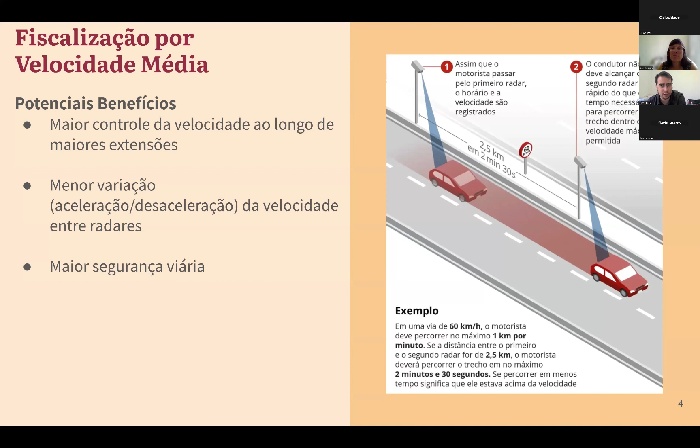The potential benefits we thought about in controlling mean speeds: number one is better control of vehicle speeds over a greater section of road. Imagine a long road of 5, 6, 7, 8 kilometers with different speed surveillance devices, but control only at a few points. With mean speeds, we could have better control across the whole corridor, avoiding deceleration between radars only. By doing so, we understand that we will improve road safety within these corridors.

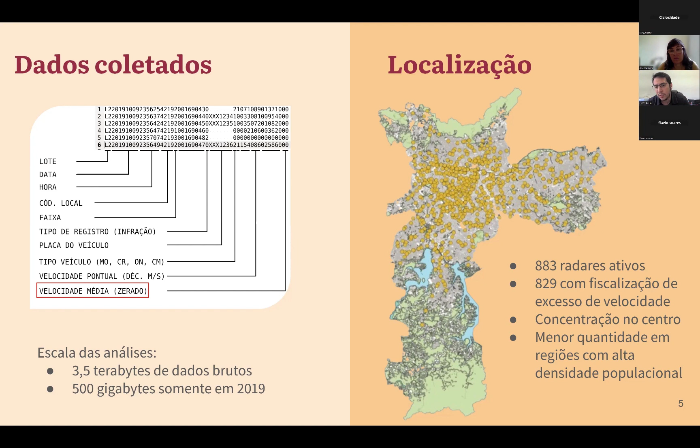So where are they located, these radars? To the right, we have a map with 883 active radars and 829 able to do the surveillance of excess speeds. We have a concentration of radars in the expanded city center, in between both marginal avenues, the Pinheiros and the Tietê avenues. However, we saw that we had less radars in regions with high density of dwellers, like the east and south zones of São Paulo.

The method that we used to analyze this data went through 4 phases. The first one was the cleaning of this data bank. Actually, they were not as organized as we would like, and we had to do the cleaning to remove some pieces of equipment.

So we used outlier removal based on intervals, excluding the data of radars that had been working for only a few days during the year. For the remainders, we also had to exclude days with very low volumes, indicating technical issues that day, so there are some gaps in identifying the problems and doing the maintenance work. So we identified and excluded those specific devices.

The second phase of our method, we defined some roads and sections, and we did the sequencing for the radars, through a physical continuity amongst these sectors. We did this in order to simplify the analysis, because we needed to be able to characterize these corridors.

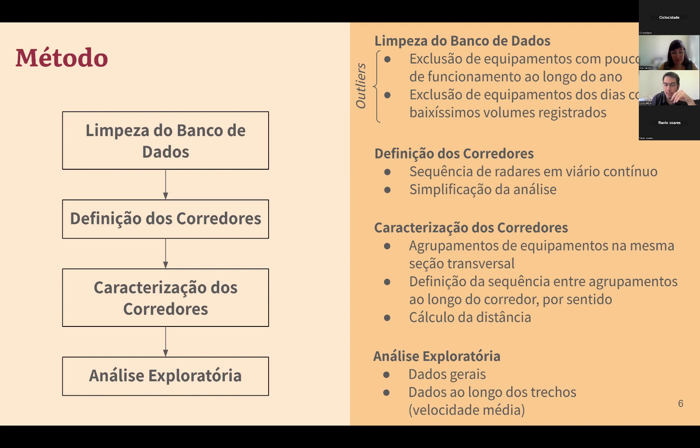And in the exploratory analysis, we defined the characteristics that can be improved for better surveillance of mean speed, and then we demonstrated the results achieved. A general view identified 28 sectors, and we only analyzed 23 of them because some were excluded after adjustments in the location of the radars. So basically, these are either arterials or express roads.

For the sides, we have here the flow of vehicles during the year. In Radial Leste, we have 34.8 million entries in the year, which is an average of 95,000 a day, bringing all the lanes together.

One of the things that we identified is this electronic surveillance in the city of São Paulo has a huge failure to identify the type of vehicle, whether it's a car, motorcycle, bus, or truck. We crossed this data with the CET data about volumes and speeds, and we saw that the mode participation of motorcycles was much lower in this surveillance rather than what we identified in the CET field research.

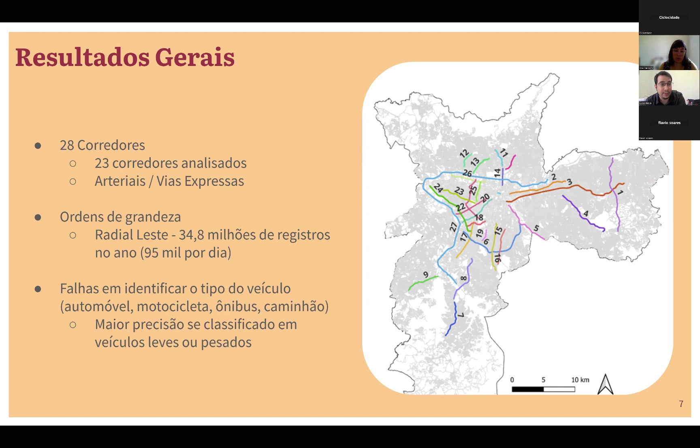However, when we classify these vehicles as light or heavy, the sorting is very close to what the field analysis showed. Some problems we had for speed calculation when we analyzed the data: first, we had a lot of consecutive radars without working simultaneously in many days of the year. For instance, radar number one worked on May 8th, but the next one did not work that same day, so they did not have simultaneous functioning.

This was one of the main issues that complicates the calculation a lot, because we should not have the entries for that sector on those specific days for the consecutive radars. Also, there's a high number of missing entries for the cars' license plates.

In our investigations, we had some meetings with producers and people who work with surveillance, and they said there are two types of effects that can lead to this: external failures like heavy rain, fraud, the solar angle, and drivers changing lanes as they go through the surveillance spots. All these variables can influence it a lot.

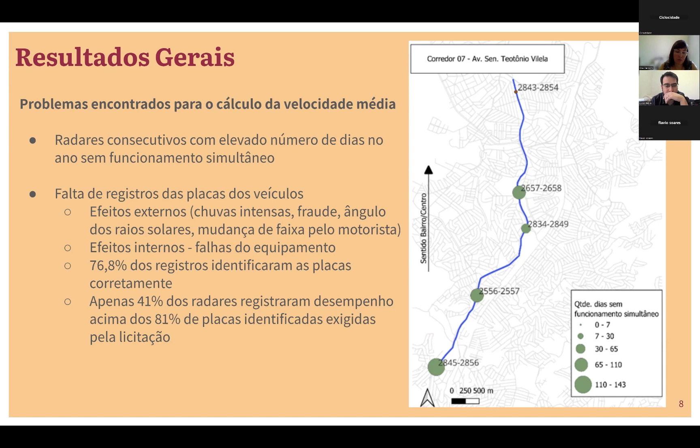However, we also have internal effects, which is the equipment failures themselves. If we take the average of all the radars we assessed, 76.8% of them identify the license plates correctly, but the bidding demands that the radars have a performance of at least 81%. So only 41% of the radars achieved this performance, and the other 59% were under 81%.

Now we have the sector results. The first one connects to what we just mentioned, which is the loss of entries due to device failures, and also because the vehicle doesn't always keep the same lane, so it may be captured by the first radar but not the second, since it left the lane. In the graphs, on the Y axis we have the percentage in green for the first radar and in orange for the second radar, for every sector. Basically, none of them will reach over 50% — very low, very low.

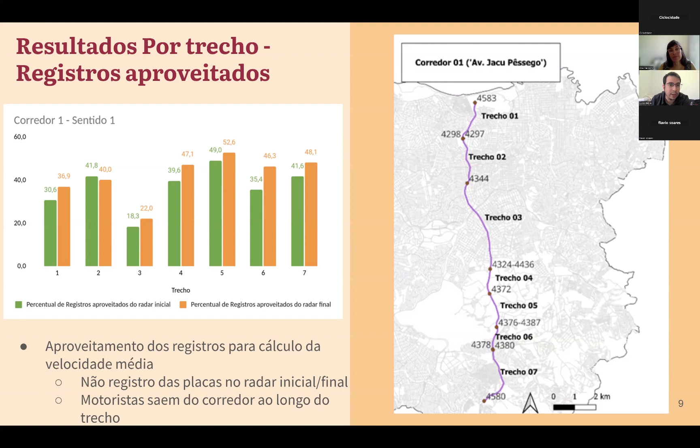And all this will cause damage. Imagine the number of people that go through these radars. If we're going to assess average speeds, we'd only be speaking about a low percentage that can actually be calculated.

Now, looking at the analysis, we have three examples of sectors with three different characteristics. The first one is Jacu-Pêssego Avenue, which is an expressway. Specifically at the beginning and the end, they are expressways with very similar features to different roads.

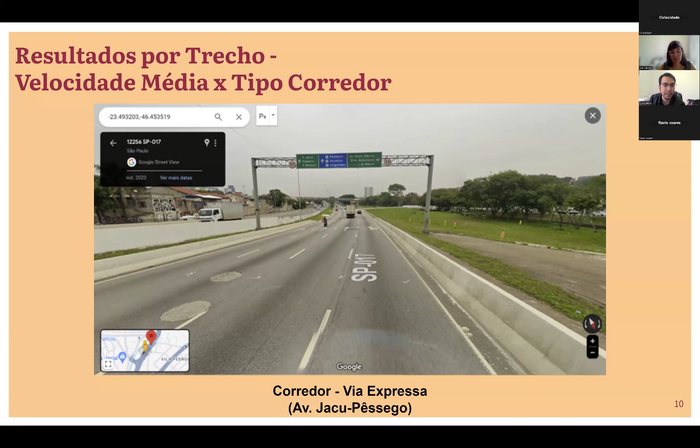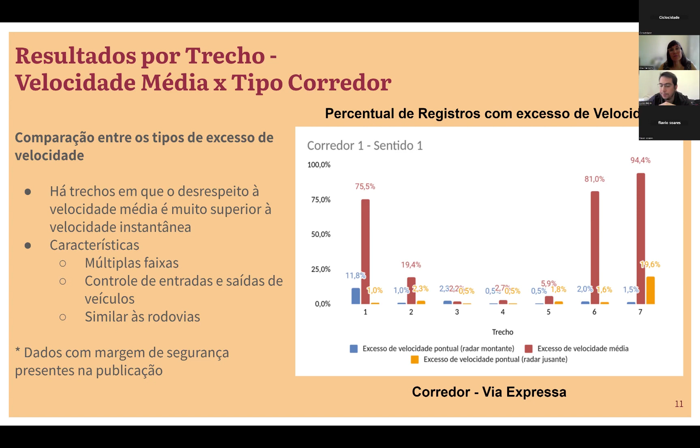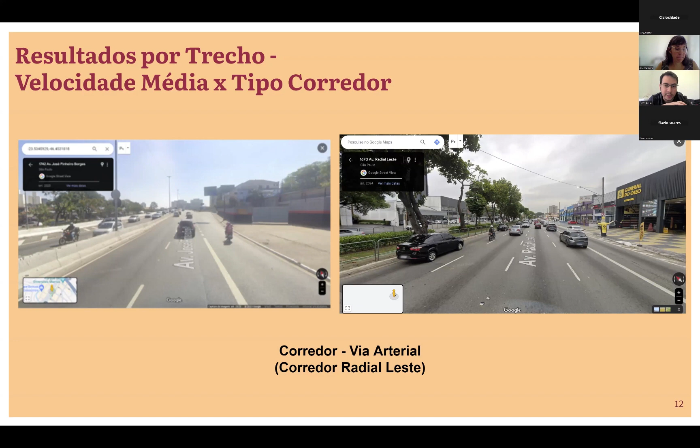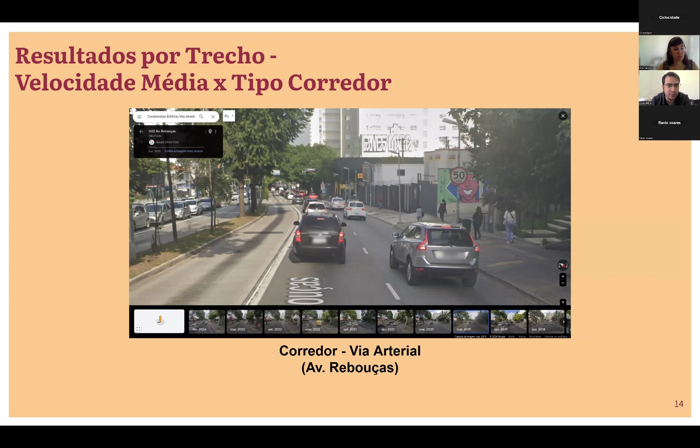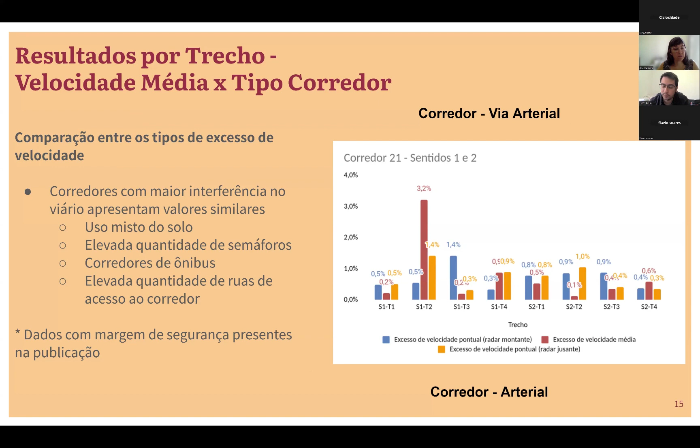A third example is an arterial road, Rebouças Avenue, with different features — basically two lanes for automobiles, plus a bus lane, a lot of land use, and traffic lights. Looking at the results, the excess speeds are punctual, at the beginning and end of every segment, similar to the mean speeds.

Okay, but we looked at the means for the whole day. What about if we broke it down by time? Because we have congestion effects to consider.

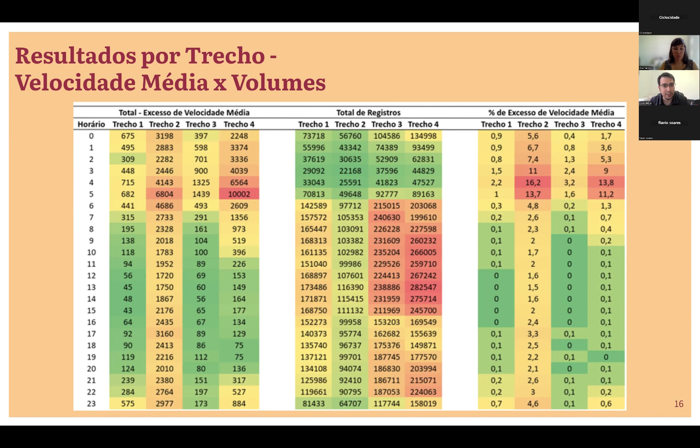If we look at the time breakdown on the left, we have the total absolute numbers of speeding for mean speeds concentrated at late night. We have entries for each segment with high volume in the morning peak, then the evening afternoon peak — however, the excess occurs during late night. So the volume of cars also influences this. Late night is a critical spot to control speed limits here, and we've seen a lot of different accidents happening at these times, late at night.

So what do we manage to get out of this work? First of all, we can highlight the need for increased demand levels with respect to the functioning of these devices, to improve identification rates and identify the types of vehicles, because for the analysis it is important not only to identify the vehicles that exceed speed limits but also guarantee the simultaneous functioning of consecutive radars with respect to mean speeds in the segments with more road features, where we have more incidents.

In the arterial roads, we have more incidents during daytime due to the number of vehicles. So to conclude, there are some indications from the empirical data that motorists actually have this behavior of slowing down when coming closer to radars, and in fact surveillance by means of speeds can be a complement for controlling speeds in the urban area.

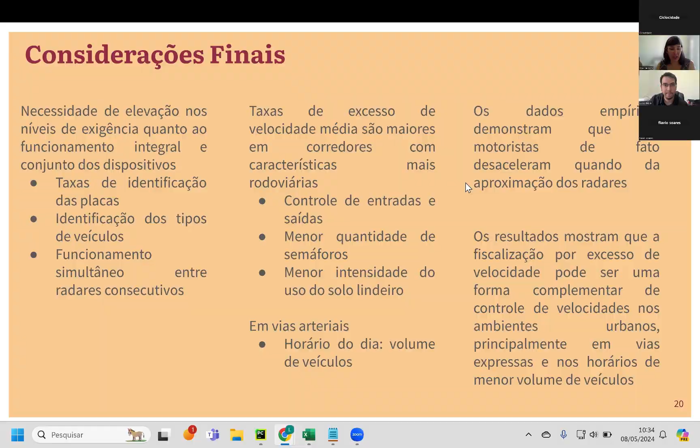I'm also going to be doing a brief presentation of Ciclocidade.

We are a civil society, non-profit organization. Our mission is to contribute towards a more sustainable city based on equal access to rights, promoting the use of bicycles as a tool of transformation.

Ciclocidade is also the Urban Association of Cycle Users in São Paulo, created in 2009, organized from the union of different citizens defending the bicycle mode who noticed the need for a representative entity to increase their individual work's reach. This is a little bit about us.

Going back a little to what I said at the beginning of my presentation, I'm here representing Rodas da Paz and UCB. Both Ciclocidade and Rodas da Paz are associated to UCB, and we represent these associations that have local activity.

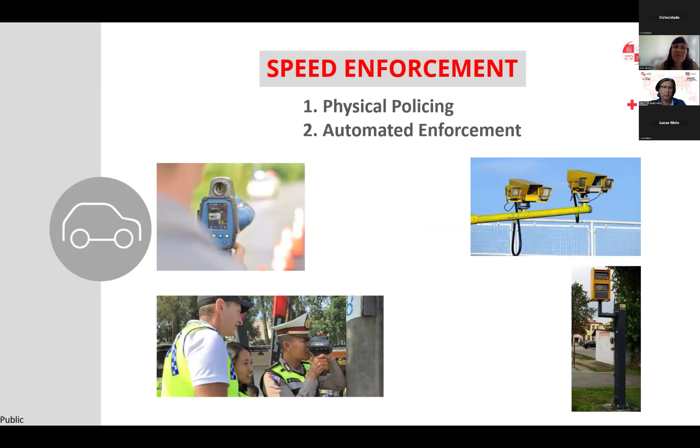So we have two types of speed enforcement. The first is physical policing, where police officers or traffic agents use handheld devices, and after detecting the speeder, the stop operation is conducted immediately. The second is automated enforcement, where the device records the offenses, and then the relevant procedures to punish the offenders are implemented.

In terms of automated enforcement, we have two main elements. The first is the regular speed cameras, which control speed at specific points - fixed or mobile cameras - and of course the section control devices.

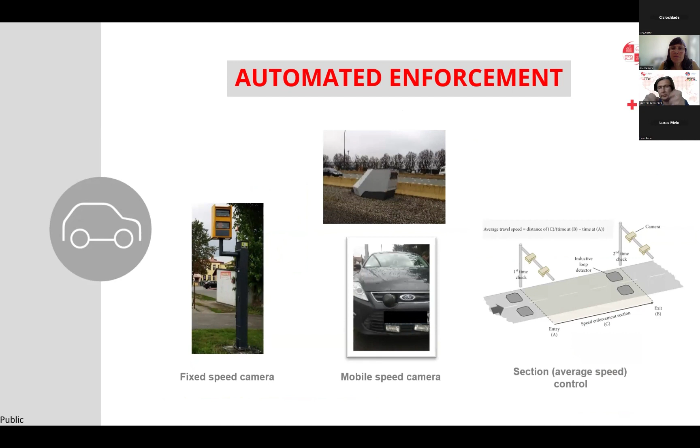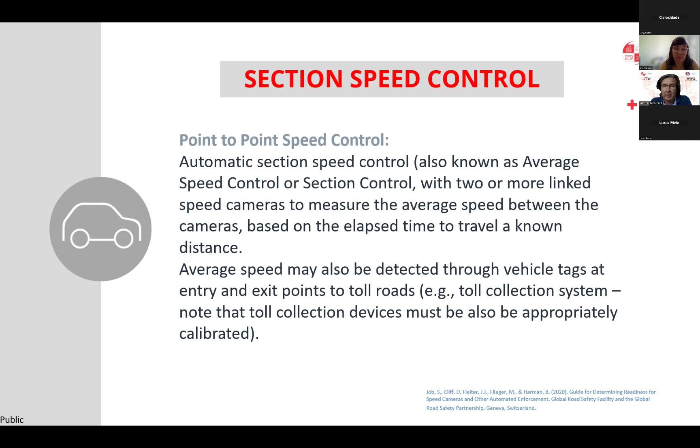Because Lucas already explained how the average control systems work, I will not go into the details, because it was very well and very clearly explained by Lucas in the previous presentation.

International experience shows that this type of speed enforcement, the average speed enforcement section control, is very effective on certain types of roads, where there is one constant speed limit and the possibility of entering and exiting the section covered by this system is very limited. This approach can avoid some issues that Lucas also mentioned before.

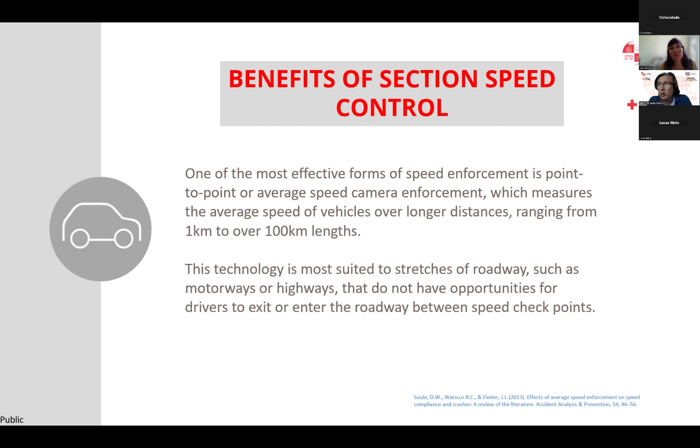Before I pass the microphone to my colleagues from Poland, I would like to share with you some general comments about issues and topics that should be considered for section control speed enforcement.

There are a few elements, not only linked with the technology, which in my opinion is the last element of the entire chain of work, but first there should be good and relevant legislation, the will to implement this kind of enforcement, and the legal base that allows effective implementation and use of section control systems.

Another element is related to section control and site selection - choosing the areas, the sections on roads where average speed cameras will be installed - and also a good database related to registered vehicles and their owners, which is necessary to effectively use the data and information recorded by the cameras, like the system to manage offenses.

A very important element, which we saw works very well in Lucas's São Paulo presentation, is the database - collecting and gathering data and information from the cameras to analyze effectiveness, and also to monitor the influence of those cameras on road safety.

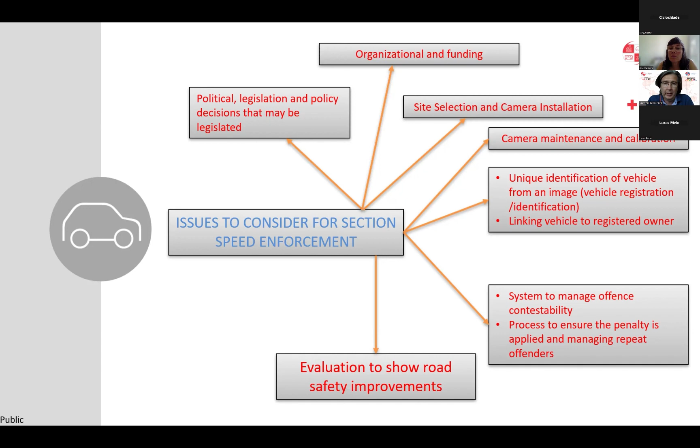Those few slides I already presented are a kind of introduction to the main part of this presentation, which is to present international examples and experiences from automated speed enforcement and section controls.

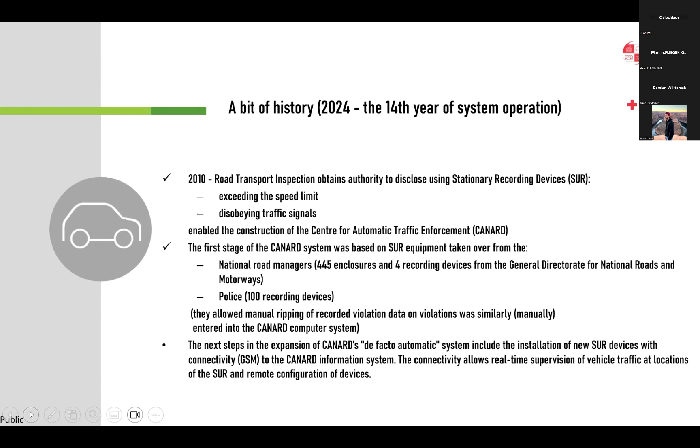But soon after creation of CANARD, we launched public tenders in order to buy new devices that were up to the task. From that time, we had already performed several tenders, and now our fleet is much bigger. So Marcin, please, next slide.

Right now we have almost 600 devices around the country. Still, the main devices are traditional fixed speed cameras. We have 470 of those. We have 43 red light devices that control different intersections, and we are still waiting for the delivery of 7 additional. We have 4 red light devices for railroad crossings and 72 section speed control. This is the part of our equipment that is the fastest growing in percentage.

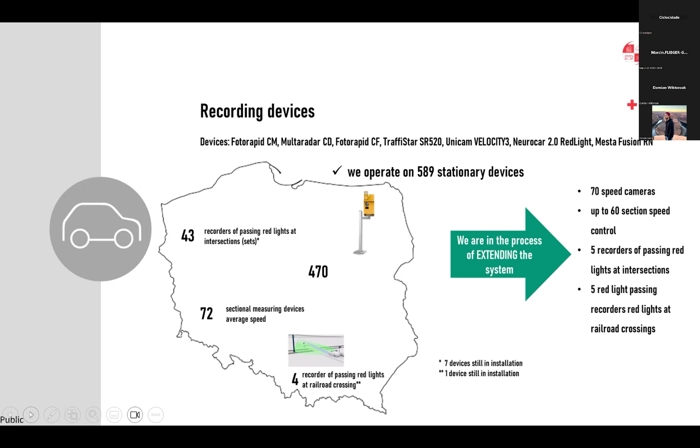As you can see on the right, we are currently in the process of another public tender in which we aim to buy 70 fixed speed cameras, up to 60 section speed control devices, and 10 red light devices. So another, please.

As I said before, we have 3 types of devices: spot speed measurement, section speed measurement, and red light. I will not go into detail. This is just a little bit of showing how they work.

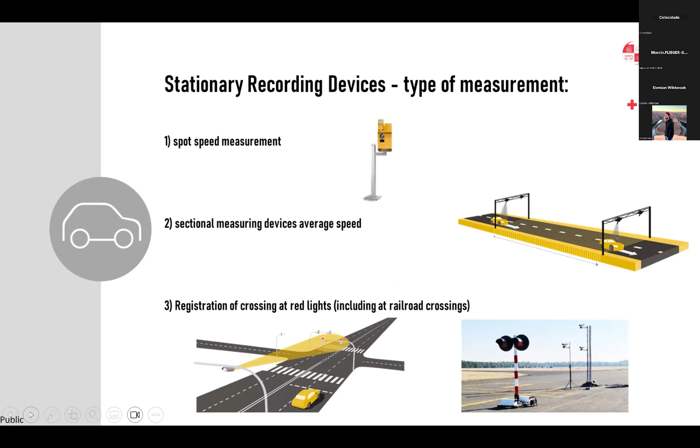Yes, Marcin, could we have the next one? This is also an example of the fixed speed devices that we have. They work based on the Doppler effect. They are radar devices, and we can use them in spots that have very high risk of traffic accidents.

They are very good devices, but they have some limitations. They cannot be used in tunnels, and they also cover just a small fraction of a road, because drivers, when they see a speed camera, they of course slow down. But unfortunately, often when they pass the device, they speed up again.

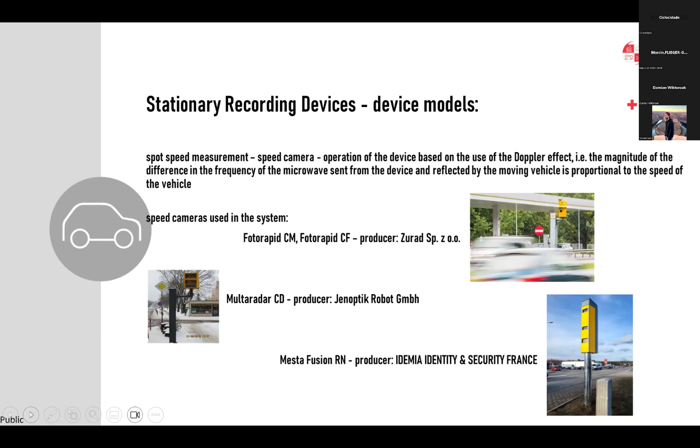Next slide, please. That's why we are using section speed control. Those devices can measure speed on long sections of road and allow us to increase safety on a larger distance. For example, we would have to put 10 fixed speed cameras, but we can use just one section speed control to have the same effect, which is much more cost efficient.

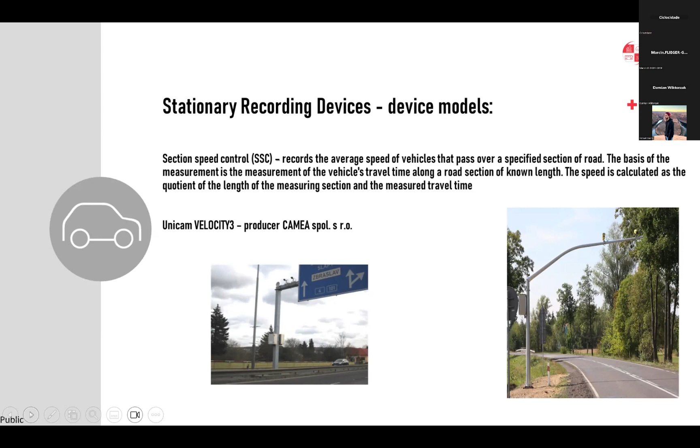The next slide, please. Here we have the principle in which the section speed control works, but as it has been covered before, I won't go into detail regarding this. Next one, please.

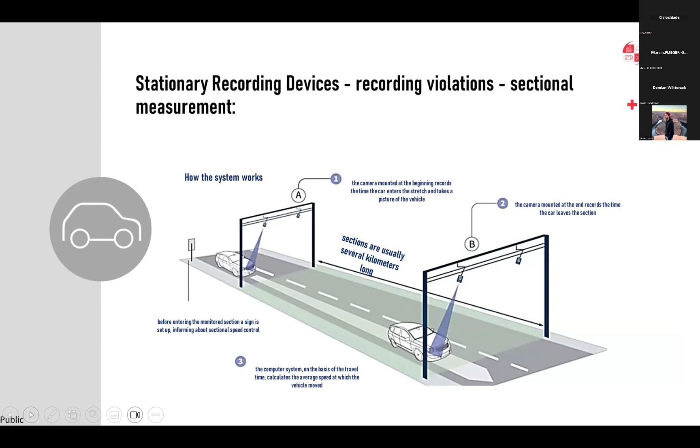In Poland, we have different categories of roads: national roads, and let's say regional roads of different importance. In the beginning, we were focused on installing those devices on the most dangerous places, and we were finding those places with the help of universities and information from the police, as well as from some road managers. But now we are focusing a little bit more on the national roads. National roads connect different parts of the country. They are of national importance. They carry the biggest traffic, and they are often the most dangerous, simply because there's the most cars on those roads.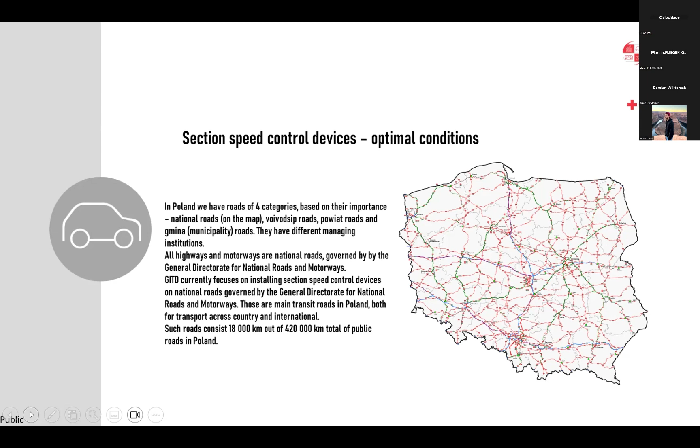Okay, the next one, please. Right now, out of those 72 devices, we have 50 devices on national roads, and 2 of those are currently being redeployed. We have 5 devices on the highways and 8 devices on motorways. On voivodeship roads, we have 18 devices. So as you can see, the biggest, most important categories have the most devices.

I don't know if you are aware, but in Poland, we are still in the process of constructing our network of highways and motorways. So we weren't able to install our devices up to this time in large numbers because the roads were often under construction. But now we want to focus on the highways and motorways, in cooperation with the administrative body that governs them, which is the General Directorate for National Roads and Motorways.

As you can see now, the average length of section speed control is almost 4 kilometers, but we will soon increase this number because we are going onto highways and motorways, where sections of road we control will be on average 10 kilometers, give or take. We will have sections that are 17, 18 kilometers, but also a little bit shorter, 3 kilometers, between important road crossings on highways.

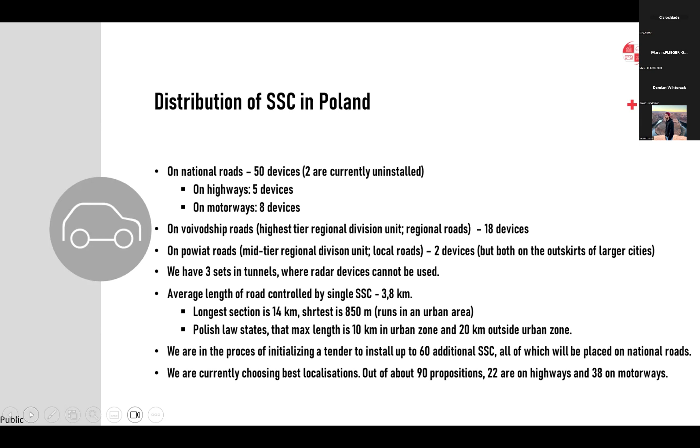Yes, so next slide, please. Using section control gives us large advantages.

For example, we can use it in tunnels. As I said before, Doppler devices cannot be used in such conditions because of wave reflection. Our National Road Managing Authority has already asked us to cooperate in installing devices in 3 tunnels, and asked us to install one in another tunnel that is being built.

Another advantage is, of course, the length of the road that we can cover with this device. One speed section control costs, let's say, 3-4 times as much as one traditional fixed speed camera, but it can cover up to, let's say, 20 times bigger area or a longer section of road.

We assume that in Poland, because we have to put up road signs warning drivers that a speed camera is ahead, drivers slow down when they see the sign and then unfortunately speed up after the speed camera. Let's say a fixed speed camera increases safety on 1 kilometer of road. So here we have, for example, 20 kilometers, or at least 15.

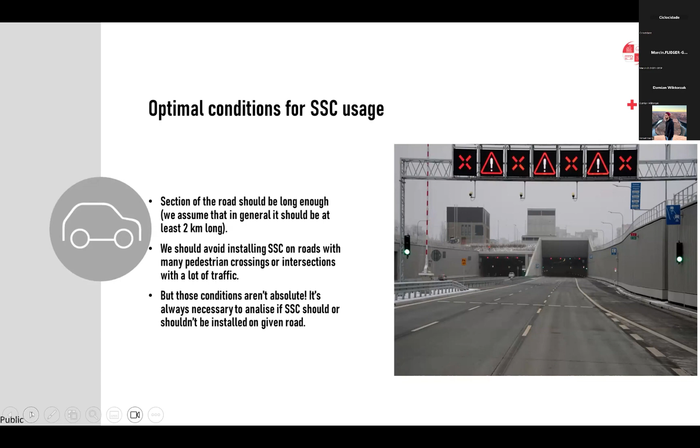Okay, next slide, please. Here we would like to show you the efficiency of our system. This is information regarding crashes, injured people, and killed people before and after we have installed our devices.

As you can see, the number of crashes has dropped significantly, but of course the most important part is the number of people who have died in road accidents. 97% less people dead in those places where we have installed our devices. So there are fewer accidents, and those accidents that do happen are much less severe.

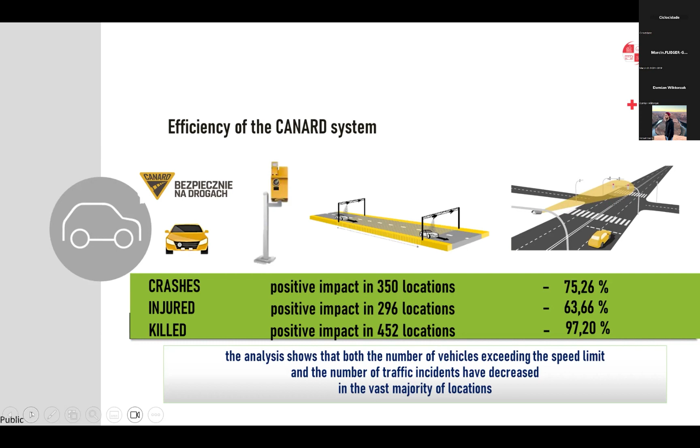On the next few slides, we have some examples regarding our improvement in road safety. Stalowa Wola Jamnica is a good example. This is a regional road that goes through a forest, and people often speed going from one town to another. Local authorities asked us to install such a device, and as you can see, after installation, the number of crashes and injured people dropped significantly, and there have been no people dead.

It's also important to point out that we are now, except for the police, the only body in Poland that can use fixed speed cameras. The police, of course, are focused on physically stopping drivers, whereas we take care of automatic surveillance.

So it happens that local authorities ask us to participate in the installation of such a device, and in such cooperation we have installed a few devices, just like in Stalowa Wola. We also cooperate with the highway authority, but with them there's a little bit of a different cooperation. Okay, next slide, please.

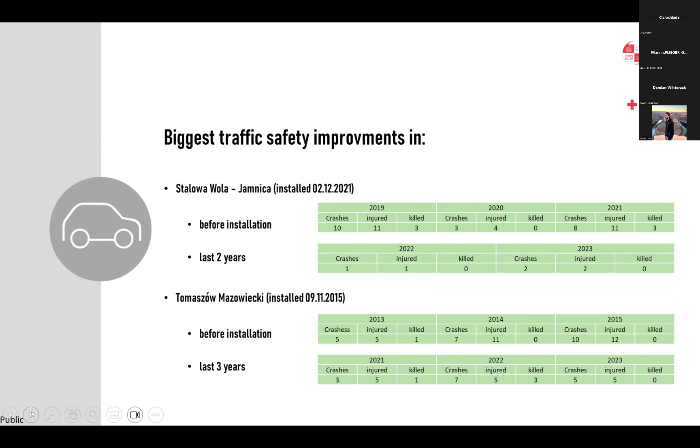So this is another example of the number of accidents that has been reduced. Another one, please.

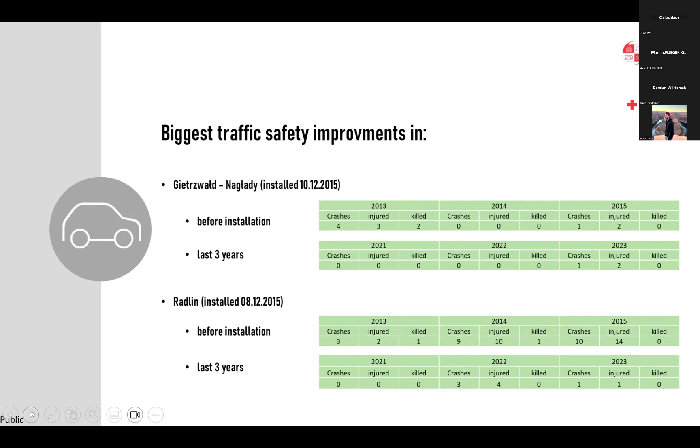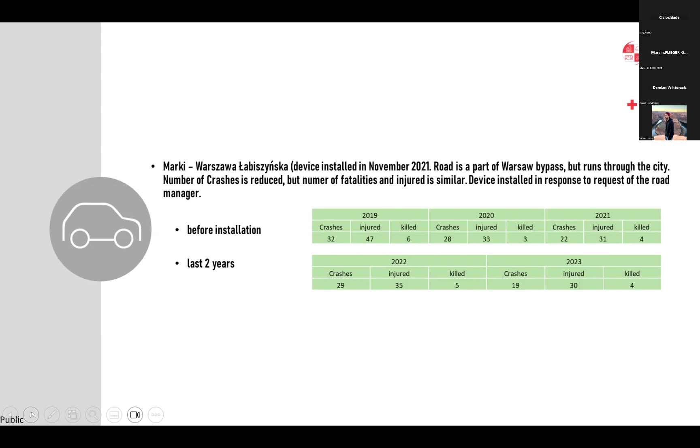They asked us to help them because people weren't obeying the speed limit. Police had problems controlling speed on those roads because there was permanent traffic. If they could chase one driver, they would have to go 30, 40 kilometers to find a spot where they could pull over and hand the driver a ticket for speeding.

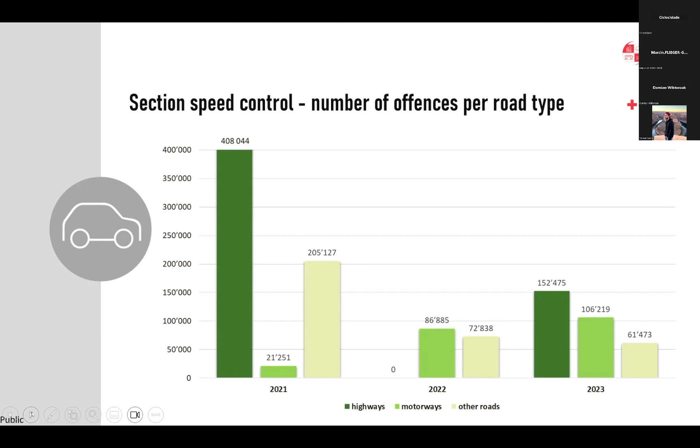This is a little more information about cooperation with different road administrators. As I said, tunnels are now a very popular topic. Tunnels are expensive to build, and every incident that happens inside a tunnel is potentially very dangerous. That's why the Highway Authority and National Road Authority ask us to help them and focus on those newly built tunnels in order to calm down the traffic.

From my own experience, I can tell you that I use one of those tunnels, and the traffic there is always very calm and very law obeying.

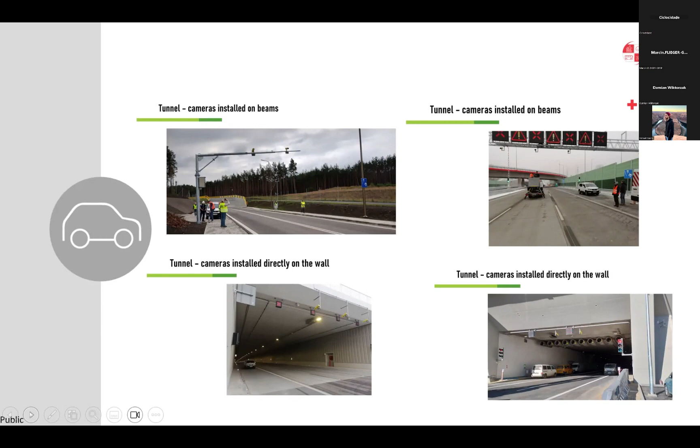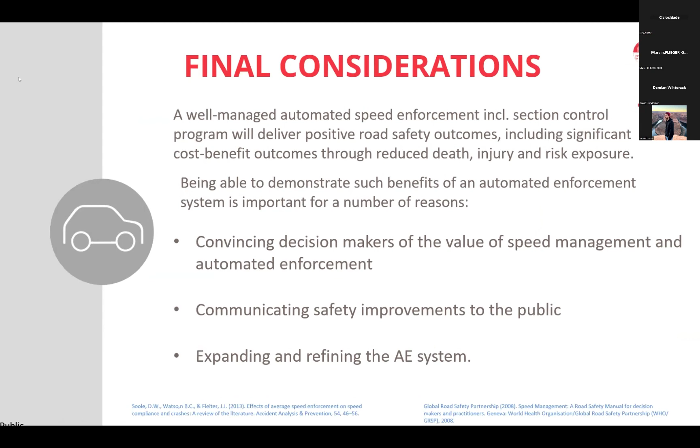Thank you, Marcin, for very detailed information about the section control systems in Poland, and what is especially important, the effectiveness of this system, because we could all see the significant progress and improvement of the road safety situation.

So I'm conscious about the time, so I will not go through all of those slides, but the final comment from my side is that section control is one of the most effective speed enforcement systems that can change road user behavior. Not only from Poland, but also from other countries who use this system, we have a lot of strong evidence about this. So I'm pretty sure this system can change road user behavior.